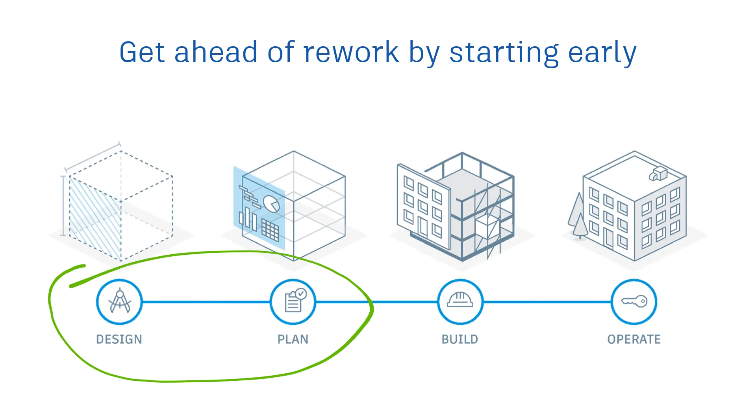So this is where we're going to talk a little bit about model coordination and the way model coordination is starting to develop and evolve. Model coordination is something I was deeply involved in over the last number of years, almost a decade now, and I lived this workflow.

For far too long, and still in a lot of organizations, we have the BIM VDC manager receive those models, from the trades, from the architects. They receive them, they federate them, aggregate them, put them together, run the clashes, review which are clashes, make a report, and distribute this information back to the team as a whole. The team reviews it, and if they can resolve it, they do, and they go back through. This is a process that does work.

However, you can see there's just a massive bottleneck of the BIM VDC manager in this process. You really can only work as fast as your BIM people can work, and the communication is really set up to work things one at a time.

It would be more efficient if we were able to get more people involved in this process throughout, and have a more strategic way to review and resolve the coordination issues that we find throughout this activity.

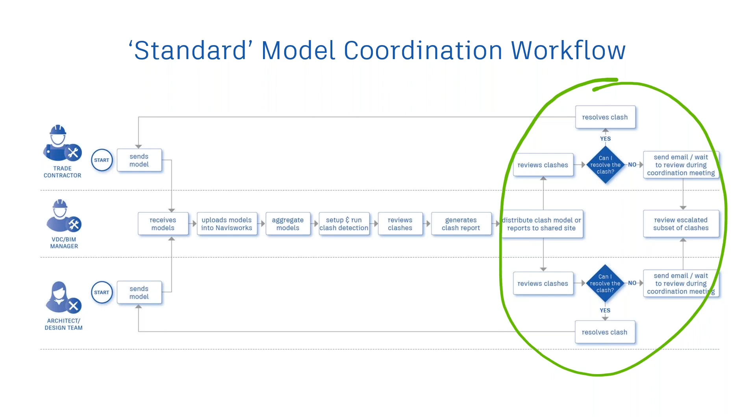One of the ways Autodesk has been working on for a few years now, and really has started to come into its own with Autodesk BIM Collaborate, is the ability to take all of the models, all the information you have, and put it in a coordination space, an area where we can leverage automation, leverage enhanced collaboration, and make it possible for the whole team to continue to

work in the same space. So that's what we call a coordination space, a place in the cloud where anyone can upload those models, aggregate them, and view them. It's kind of like a Google Drive, but made for BIM.

Some of you may also be using tools like Autodesk Glue, and this is taking that to the next level, where we're able to pull this information into a common data environment where the team as a whole can continue to upload and work in it. When you do that, you're really starting to leverage the power of the platform.

When you put it in the coordination space, you're going to have the machine do some of that work for you. It will automatically do clash detection and group those clashes in a number of different ways that can be sorted and tweaked automatically. This takes a big part of the bottleneck out of the system that normally the BIM or VDC manager is doing through something like Navisworks, where they're grouping and deciding where the clashes are. This helps do a lot of that initial heavy lifting, making it easy for a BIM and VDC manager, or other teammates, to identify what really is a clash and coordination issue, and dial in strategically on those.

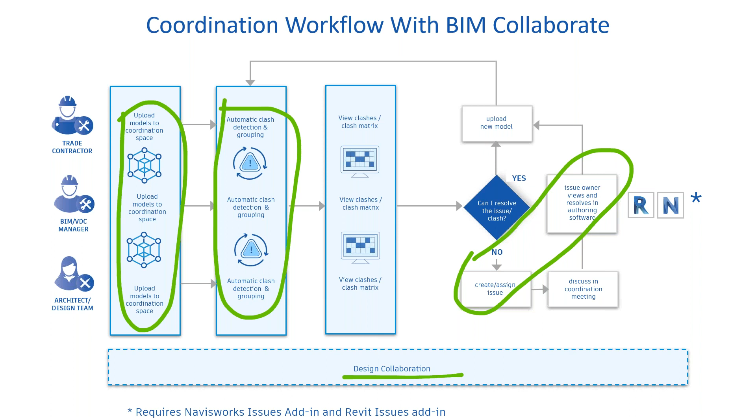So let's take a look at what some of that looks like here in the wild. This is model coordination within BIM Collaborate. I'll back up a little bit to make sure we're level set on what Autodesk Construction Cloud looks like. This is our latest achievement here in 2021.

We announced over a year and a half ago taking the different tool sets that Autodesk has, be it BIM 360, PlanGrid, and the acquisitions Autodesk has made over the last couple of years, integrating them but really unifying them into one cohesive, unified platform. That's what Autodesk Construction Cloud is. This is our single platform with single sign-on to log in and see all the projects you're connected to. These icons show Autodesk Construction Cloud projects, as well as other projects within our Autodesk family, like BIM 360 projects.

Going directly into a project, you can see where we can start to leverage all the information across the project lifecycle, within all the different pieces we have within Autodesk Build, as well as within BIM Collaborate, which activates these design, collaboration, and model coordination areas within the project. Now everything continues to work in one common area. You can see recent activity on my project: 1,600 issues being tracked within this one project, in a number of different areas, with almost 150 different users. This brings all that information into one single place and lets us look at what we're doing within model coordination.

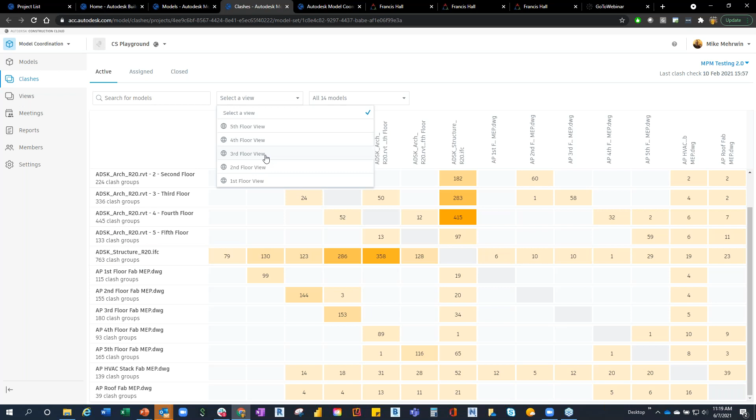I've also broken this out into different views where I can take a look at this more directly, broken out onto the different floors, so now I'm just looking at what floor I'm on—I'm looking on the 3rd floor. All this has happened automatically. The only thing I had to do on my end is create the space and drop these models in, then create some views, which is really just choosing which models I wanted to save as a view. So it's a very quick, easy process, but you get the benefit of all this automation from that.

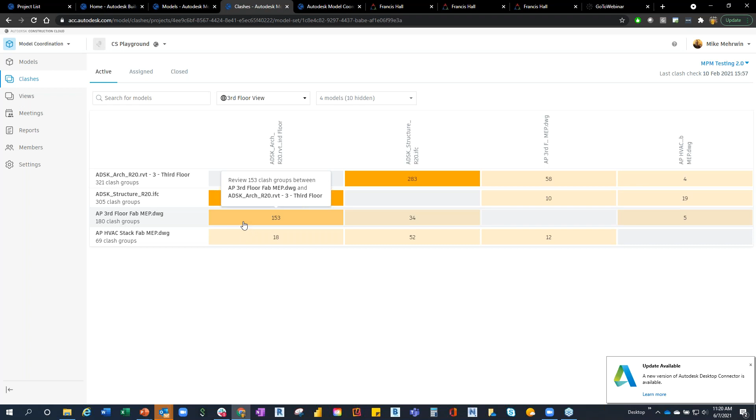Going into here, I was going to just click to check out my 3rd floor MEP against my arc. This is what you see when you get in here, and it's very clean. It's very easy to see that there are a number of different groupings here with 244 clashes to address.

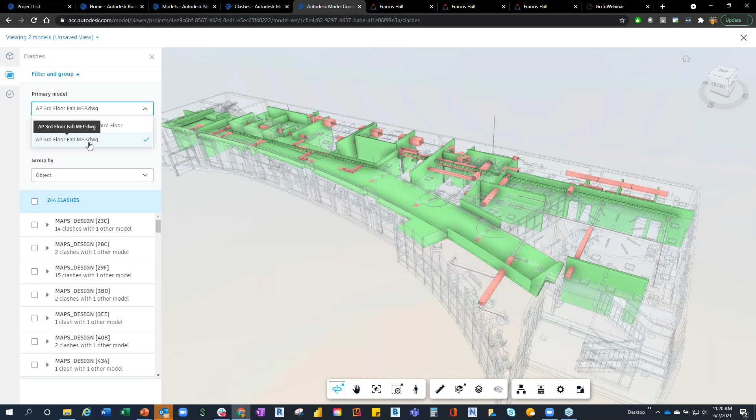If you didn't want to look at it from that MEP DWG side, you could switch to the ARC just as easily. It changes the clash groupings, changes the colors, maybe makes it easier in some ways for you to go through and address these clashes. But for this example, I'm going to go back to my MEP, because one of the things I ran into a lot as a VDC manager is just clashes that don't mean anything to me. I want to get rid of them as quickly as possible so I can start to address the real coordination issues on this project.

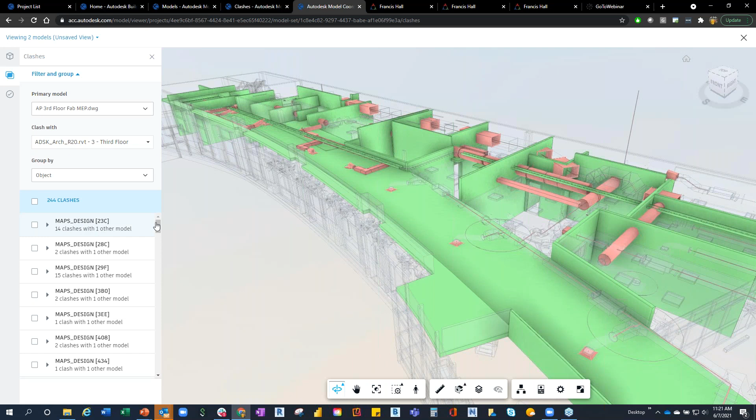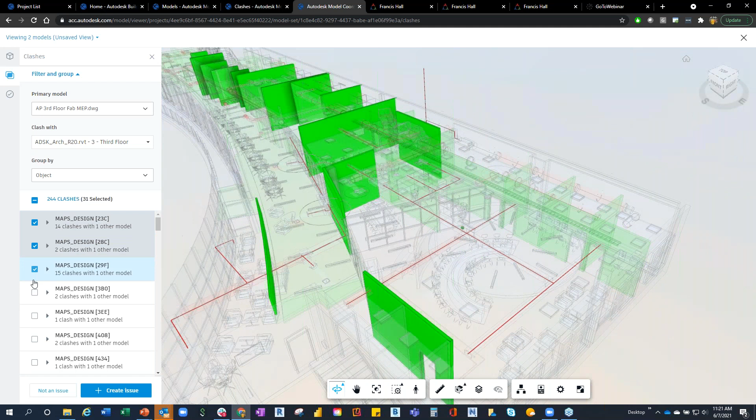One of those that I've identified over time is this design component within AutoCAD 3D in particular. You can see it—it's just kind of like a line that denotes those HVAC or piping alignments and line work. So I can very quickly go through and grab all of these different clash groups here that are design. I want to get to solid—that starts to get to the actual model work.

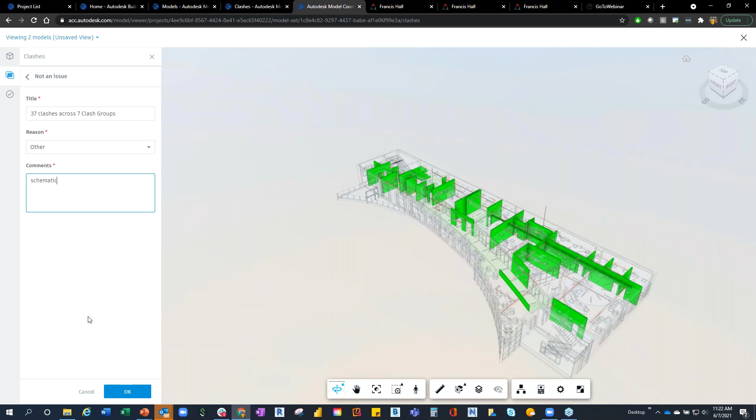Now I have 37 of these, and I can just say these are not an issue. I can decide that this is just a schematic idea here. I can click OK, and now I'm dealing with 207 clashes, a more direct idea of clashes.

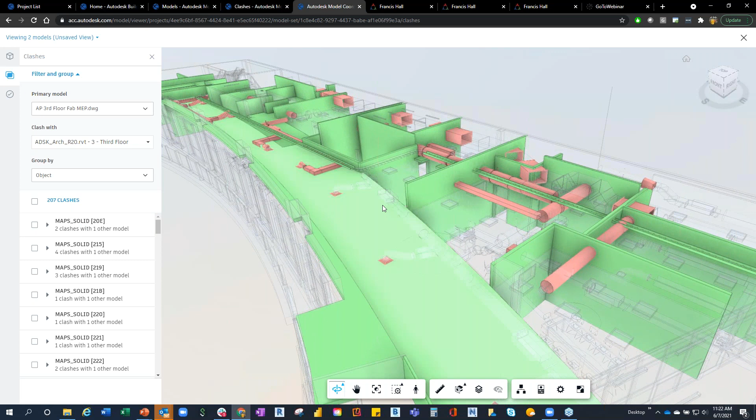If you're a VDC manager looking at this right now, you may see a number of other areas that are really not clashes, but I can't get rid of them all, or I won't have anything to show you guys. So with the ones we do care about, we want to be able to identify them quickly and start acting on them.

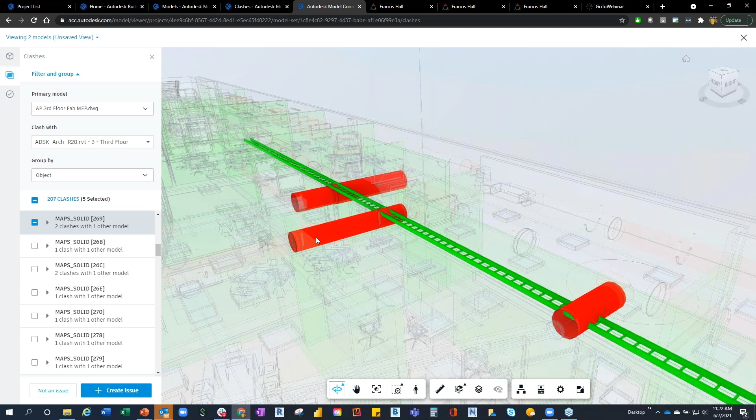So I'm going to look at this one right here in this cable tray. You can see that it has a number of different clashes across this floor. By grabbing this, I've created a grouping here, and all I have to do is create an issue, click on that, click a dot on the area to create that issue.

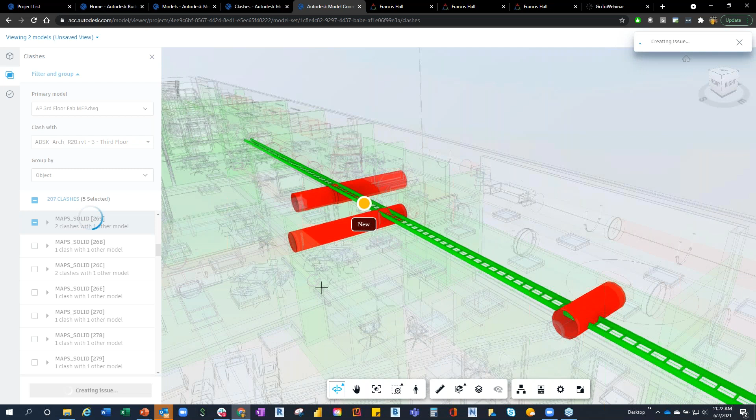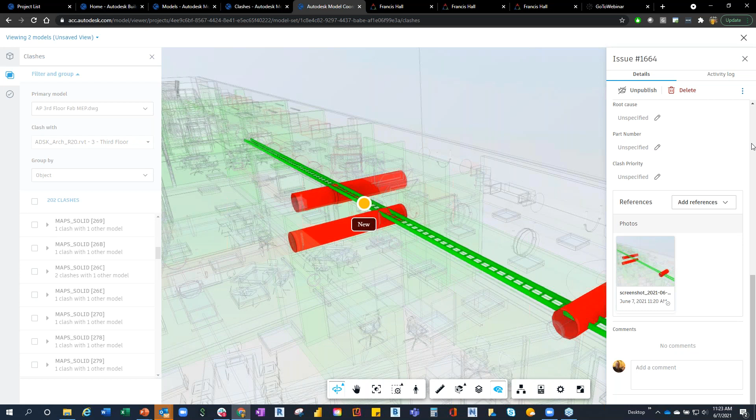Very quickly, I've now pulled all this information together, and this issue is something I can then go in—I have a description, I have a screenshot. I can add additional references if I want, but I can create this coordination clash type and create this clash, which would be issue 1664. Now I have that issue created, and it goes away from my list here, and I'm down to 202.

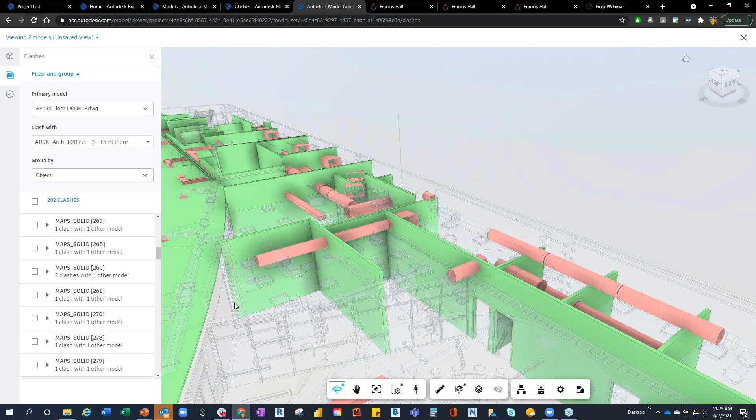So very quickly we can go through an entire set and coordinate, dividing between the clashes that are the noise and the real clashes, and then we can easily go into our project as a whole and see those issues, and be able to create reports from those issues.

The second area we're going to take a look at is really about model conditioning, and how we can leverage the model we have and make it even more rich with data, giving us more meaningful data points that allow us to make more strategic decisions about project execution.

You can see here a great example of a design model on the left, which looks great and has a lot of good information in it. But imagine if we can take a lightweight tool and apply additional model conditioning to that, and then we're able to separate out and get a better view of what we're looking at within the project itself.

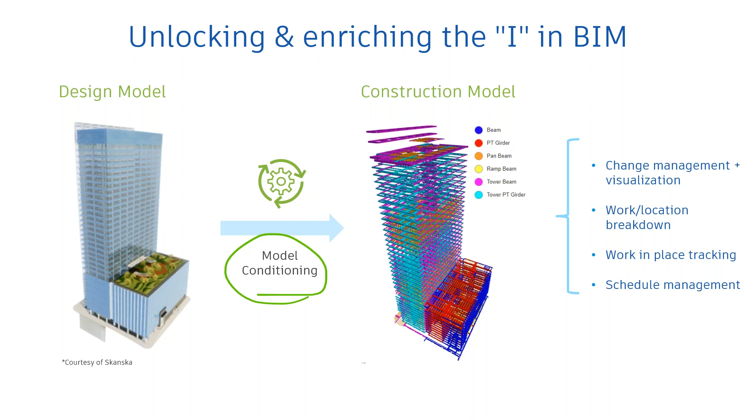Some of the ways we'll highlight today about using this data to condition your model include visualization, work breakdown structures, work in place tracking, as well as schedule management. We'll take a look at a few of those as we move through.

So these are the areas. I'll run through a little more detail on these before we dive into Assemble, which is what we're going to use here to help condition those models. And I can show you in real time what that looks like and what you can do with it.

When we talk about model conditioning, in a lot of cases we're starting with a model from the design side. These are becoming more and more data rich, with more organizations pumping a lot of information into their model families, and that's great. But it's probably not going to catch everything that downstream users, particularly on the construction side, or even later on within operations, are going to need. So the ability to condition that model and add additional properties to it is key.

So using Assemble, we're going to be able to break down our model into relevant scopes. We're going to be able to get into advanced work packaging, for example, or add schedule information and installation status, and so on.

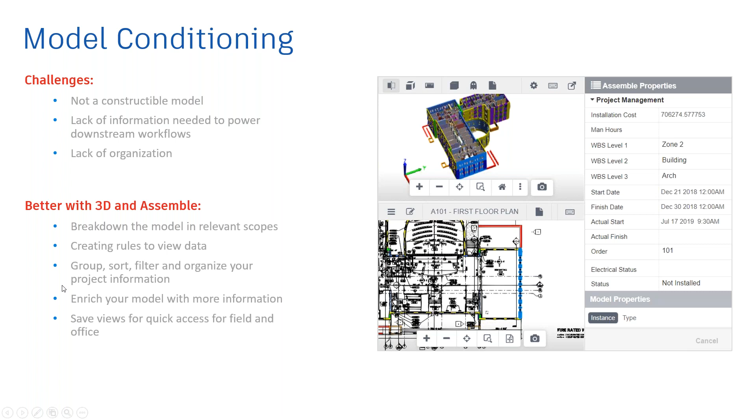So right here on our Assemble properties, you can see under this project management tab a number of custom properties we've been able to add. You can add anything you can imagine for a custom property to tie directly to actual model elements, and then we can even apply a color by property to those, which is going to help us see that. I probably said that one slide too early, but keep that in mind for another 20 seconds.

Within change management, we're able to look at how we can show changes on a model as well. So being able to look at models as they progress, you'll see what's changed from one to the next, and actually have the variance in the actual quantity takeoffs, which will definitely help streamline what's changed. You can see what's changed, and validate that against the change orders you're working on, the estimates you're making, and make smarter decisions.

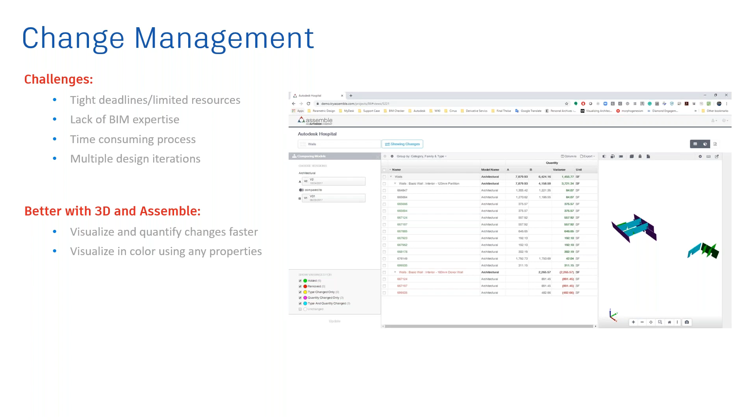And then finally, we can look at work in place tracking, where you can leverage our mobile app to go out into the field and update installation statuses within the system itself. You can then have them colorized, where it's visually very easy from anywhere to see what that status is looking at, and it's very easy to quickly access those views to update those properties.

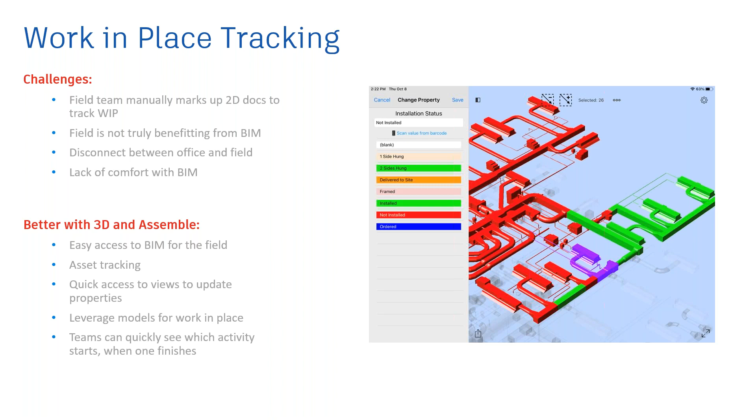And then when we talk about scheduling, we're still working in the industry on best practices for how to usefully, or practically, attach schedules to BIM data. There have been a lot of different ways people do it, and I think one of the largest ways we get that is from visualization. But from the visualization side, that's one thing.

But if you're able to connect your work breakdown structures into your model using Assemble properties, you're going to be able to really break down and have a much more complete view of how this information is coming across. And then for you data scientists out there, and others really into the data side, pulling all this into Power BI integration -- Assemble has a really great Power BI integration that allows dashboards to be created directly from the Assemble databases.

The more information you're putting in here, the more information you're getting access to from the Power BI side. I've seen some pretty amazing Power BI integrations to Assemble data-rich models, being able to pull that information and really have the power of the data moving your project forward, helping you identify risk, helping you identify areas of concern long before they become rework and start to cost you money and time.

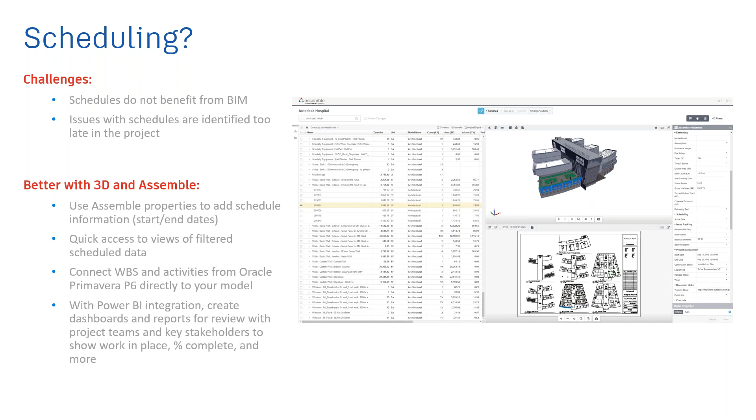So we'll close out here for a couple minutes. I'm going to show you a little bit around Assemble.

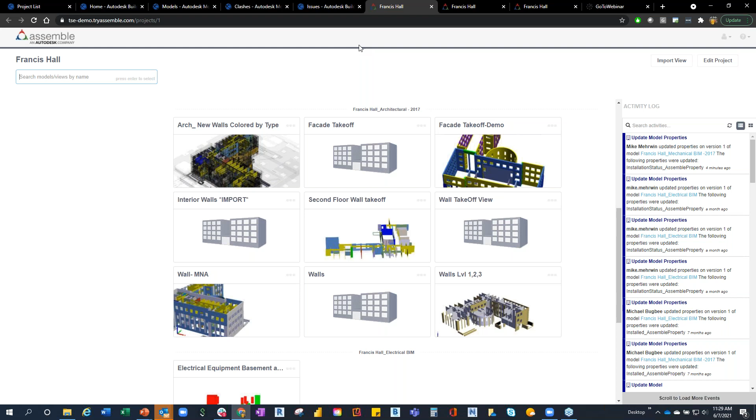So this is Assemble in my Francis Hall school project, and this is another one of our tools. Very easy for you to access. It's web-based, you just pull up the URL. It's very simple to give access to everyone on your team and very easy to see visibly, even before you click into any of these, what's going on in these different views.

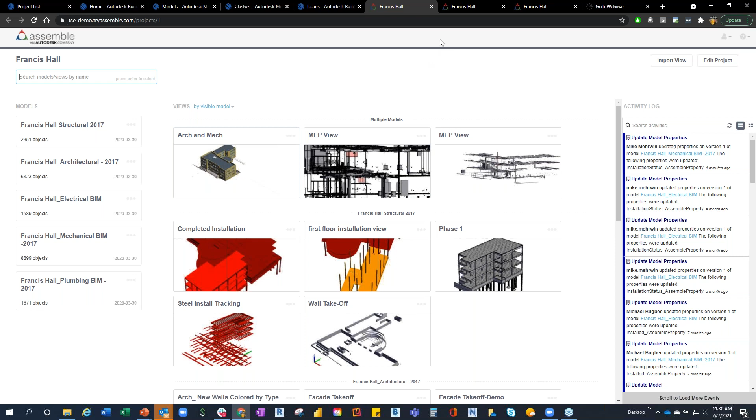To level set here from the Assemble side, what Assemble is doing is really publishing out all of the information within that model, and putting it in a way that lets you consume that information. You can see all the element objects that we have within the different models within this project, as well as being able to click on any of these different views and see the inventory.

So if I click into that Francis Hall architectural and mechanical, I can see all the different items that are in this. I can see the takeoff of what ceilings I have and what floors I have. I can see all this information, whether I'm looking at it from the inventory side, or from the model tree, where you can see how many different counts of items that we have.

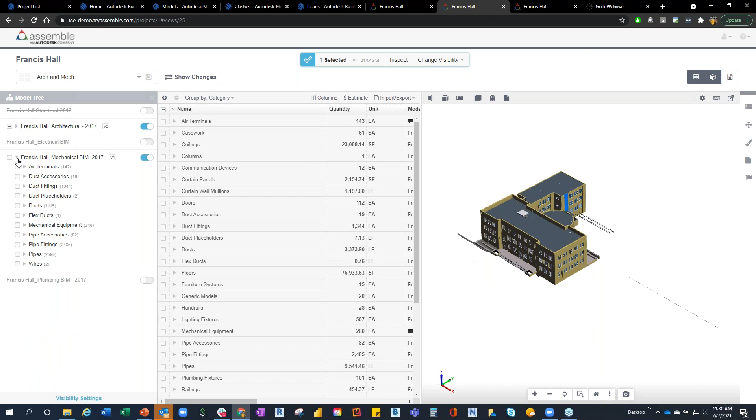All this is really great stuff for Assemble, but this is kind of Assemble 101. What we want to talk about today a little bit more is really those custom properties.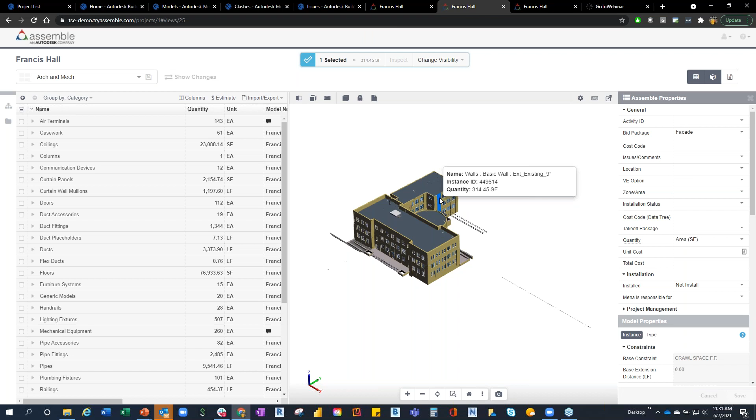Clicking over here, I'm going to turn my properties box on, and I've already selected a facade wall right here, you can see it's in blue. I selected right there, and within there, first thing I can do is look at all of the different properties that have already come out of Assemble, and all of these can be filtered and viewed, and create different views and updates from there.

But it's the real power is when we start to add in these different custom properties, right? So being able to add what bid package those have been on, and have that easily update, cost codes, what takeoff package we have, even installation status and other items, like our work breakdown structure like we discussed earlier. This is a way that we can continue to add more model information to the project.

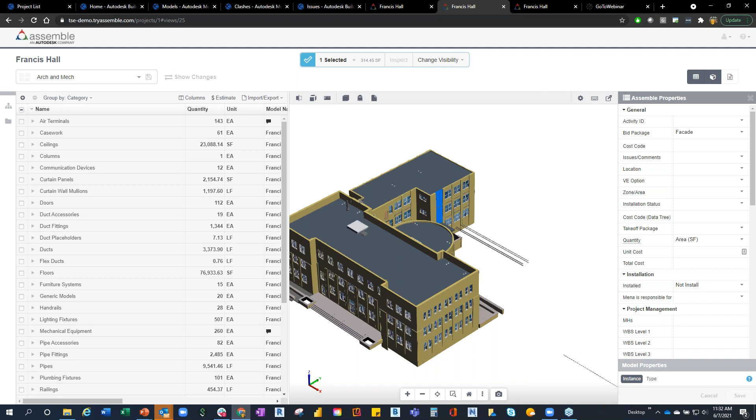Another way that we can leverage this too is by grouping that information, not just by the category of what it is, but by the installation status, for example.

So we made a custom property for installation status, and we did two things to it. I'll click on one of these. You can see where we have that installation status right there, that's where we have it updated. It shows up in our inventory right here as an item that's installed, and we still have another 200 or so items that were not installed.

But one way it makes it easy, you can really tell what's been installed here and what hasn't, because we've created that color by property, and that's a very easy and visual way to see what's been installed and what's not been installed.

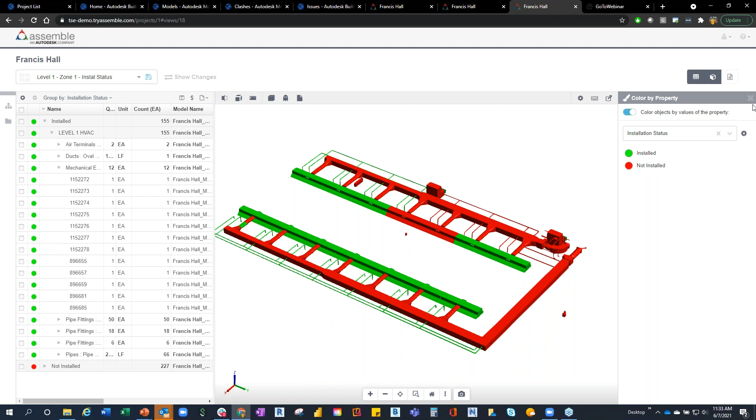And this is something that comes in very handy on the mobile side when we've created a view. For example, this level 1 zone 1, we want to be able to see what's been installed and what hasn't, and be able to very quickly update that.

So if we're out on site and we see these two items right here, we want to mark them as installed. It's very easy for us to go in there and click from an installation status of not installed to installed. Click save, and the color updates, our quantities update. All of this information updates itself for us to be able to leverage.

And this is getting some double duty here, taking a look at our schedules as well. This is another way that we've been able to work with a lot of different organizations to help really practice good phasing of projects, be able to start to put the schedule integrations together.

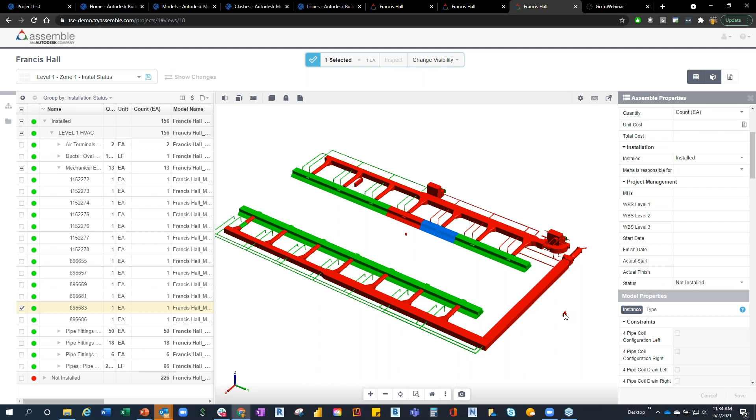Imagine this on a large data center, or a large customer on a battery center where we've had to phase installations of 1,500 different battery stations, and being able to leverage that with these custom properties, show it by color so they can see what's been put together, what's on site, when things are supposed to start. You can start to filter by this information. It really unlocks the power of BIM in a very meaningful way.

This is an area I'm super passionate about—it's why I joined Autodesk. It's about working with organizations across the world to leverage the information they already have and make the best out of it, to help put dents into some of the largest challenges in the industry, one of which is the cost of rework. These are a couple of ways we've done that here at Autodesk, leveraging BIM Collaborate as well as Assemble. I appreciate the time you've given me today, and I'm looking forward to your questions.